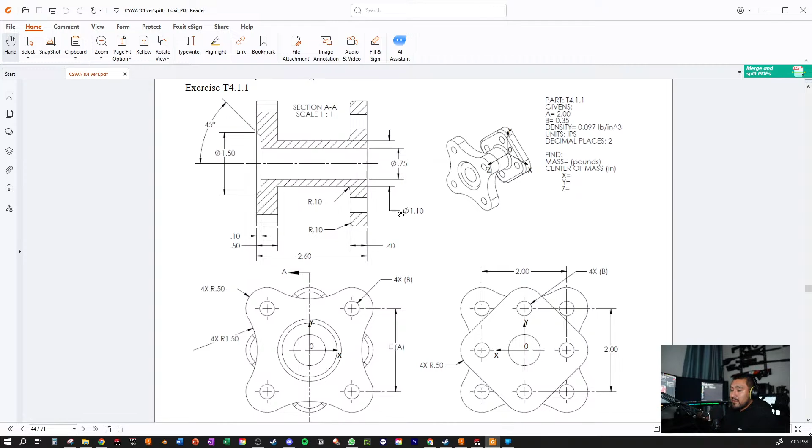Okay, do you see the two projects in there, or you might even have these in your packet? So for those who are wondering, I'm gonna go over a couple lessons from my packet, some basic parts. Juanito, you should have these as well. I'm just gonna go over this basic part. It's kind of my go-to to teach people. And I never made it in Fusion 360 before, so it's my opportunity to try it and see how far it goes. If you want to follow along, let me know if you have any questions. Don't be afraid to ask me. If you have questions, most likely someone else is gonna have that same exact question as well. So, all right, let's start.

So hopefully you guys have it installed as well. This is the Fusion 360 3D graphics area, whatever you guys want to call it. It starts off with this once you download it. In my case, I have a SolidWorks background, so I'm gonna change a couple things in the settings. To change your settings, go up to your name over here, and go to Preferences, to give it the same control of the movements of your mouse.

Right here, there's pan, zoom, orbit shortcuts. Default is going to be Fusion 360, but I'm going to change it to SolidWorks. And to keep everything lined up with SolidWorks, I do Y is up instead of Z is up. Those are about the two parameters I change. It's just my preference, but if you want to follow along 100%, this is the way to do it: Y is up, and SolidWorks type controls. Press OK there. Are you able to do that on yours, Juanito? Do you have Fusion 360 on your computer? Yeah, I do. Okay, cool.

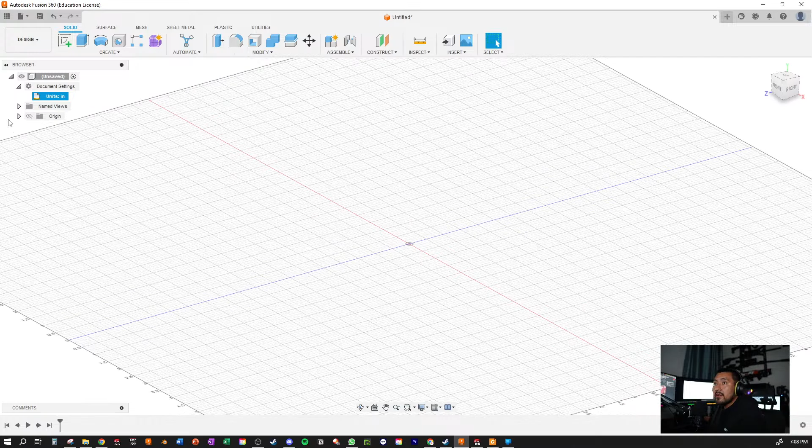So in the tree, we're gonna drop down this menu. We're gonna change the units, and we're gonna change the unit type over to inches. And press OK. And there you go. I got inches instead of millimeters. Now the question is, how do I start this part here?

I've taught this part a couple of ways, but I want to see if I could do it a different way. I usually start on the plate, and then the extrude boss. Actually, I might just do the same thing. I might just do plate, and then extrude boss in the center. So I'm going to start with this view first, and then work my way to the other view. Actually, I might do this view first since it's all in the back and the origin's back here.

So I'm going to start on this view first, the 2-inch, and then the radius. And then my B variable. I'm not going to do the variables in this one because I don't know how to do that on Fusion. So it's just going to be plain simple. I'm going to type them in. I know there's a way to do it. I just don't know how to do it.

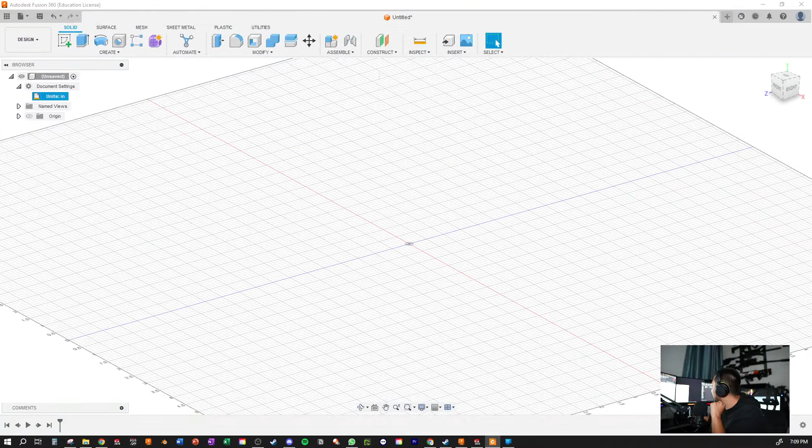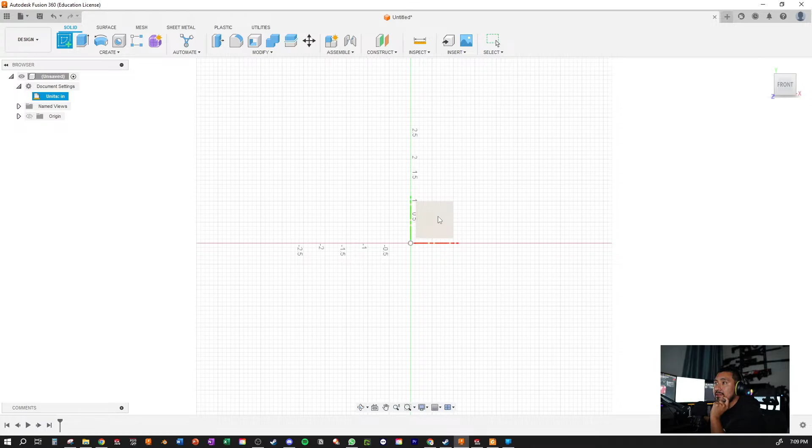So I'm going to go to the front view. I'm going to hit my front view here. I'm going to click sketch here. This is how you create a sketch. And I'm going to select this highlighted square box that basically represents the plane in Fusion 360. I'm going to click that box.

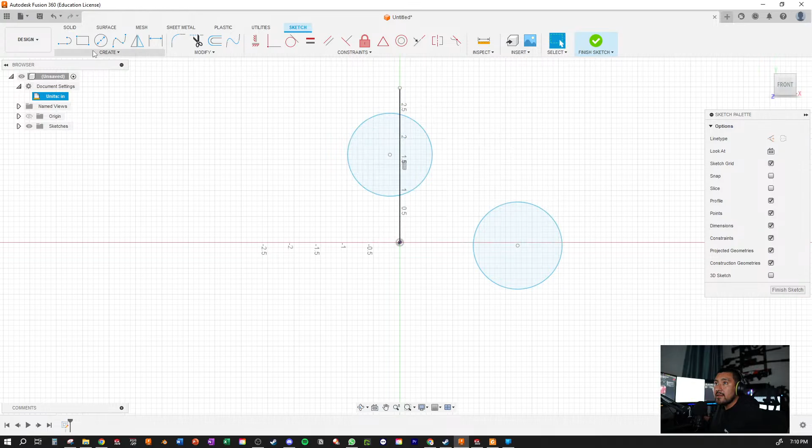And then the way I like to start it is I'm going to make 2 circles. So I'm going to grab the circle tool here, circle diameter. I'm just going to make it in 2 miscellaneous places. Hit escape. And then I'm going to grab a line, go from the origin all the way straight up, hit escape. Grab another line, select the origin, go to the right this time, hit escape to deselect it.

Then I'm going to select both lines, right click, and then there should be set as construction center line. There we go. That's just kind of help me tie these down. And then I'm going to be able to mirror all this when I'm ready. And then I'm going to grab a line, drop it down to the right. I'm going to hit control on both of these entities. And then I'm going to right click and hit tangent for one of them.

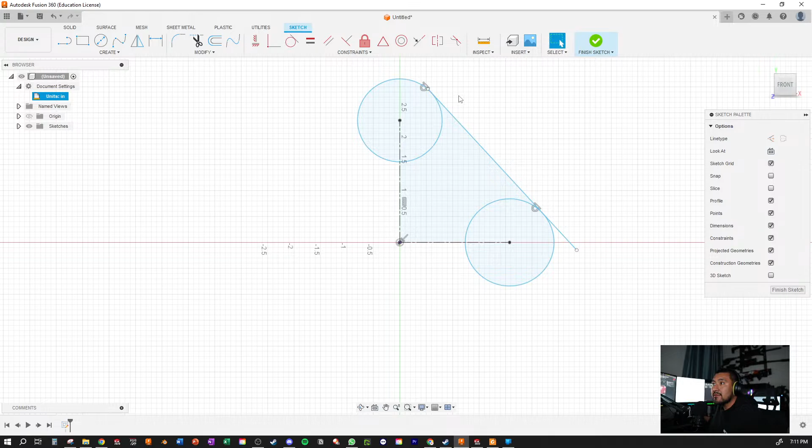I'm going to select these two, hit, oh, that's nice. It did it automatically. Did not know it could do that. That's actually pretty cool. Let me see. And then I'm going to see this small corner right here. I'm going to try to trim it. So up here, actually above modify, you're going to have the trim tool. I'm going to select the pieces I want to trim off.

How you doing there, Juanito? I'm doing good. Doing good? Okay. I want to keep on going then. Let me turn up my volume just a bit. Okay.

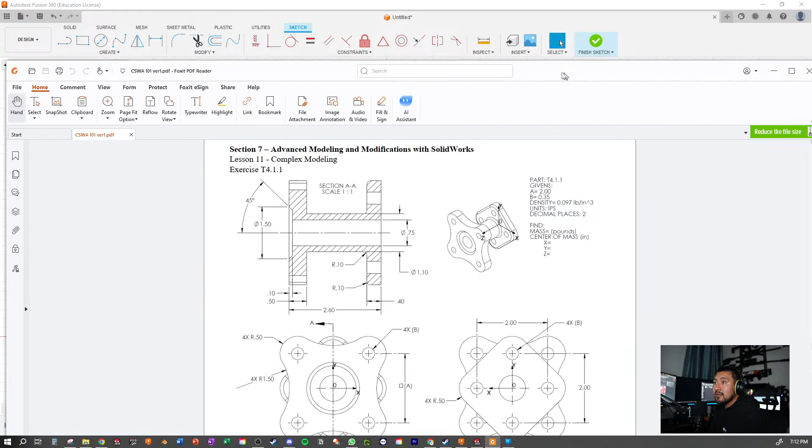Ooh, sorry. And then right here, I'm gonna select the line. Actually, no, I don't want to do that. I'm gonna look at my sketch real quick, because I'm not really sure where I'm at. 2 inches by 2 inch with my little tiny hole in the middle with a 1/2 inch round. So I'm gonna do the hole, I'm gonna do the round, and then I'm gonna do the 2 by 2. So let me grab a hole

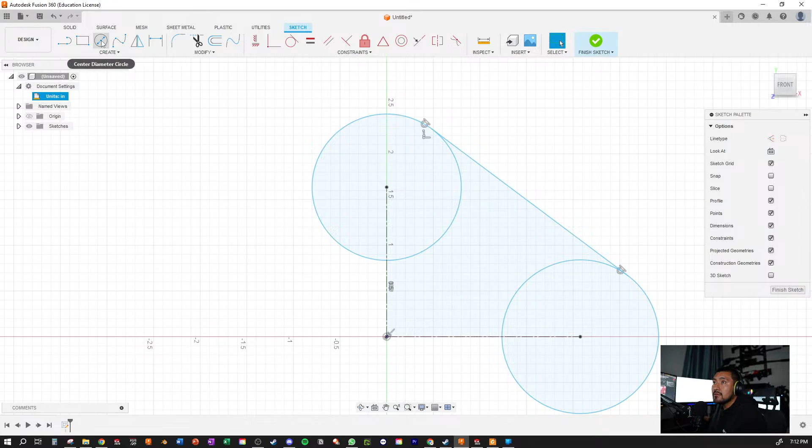right there, right there. I'm gonna select both, right click, equal. Then I'm gonna select both of these here. Right click, equal. And then the dimension for these is going to be the B variable, so it's going to be 0.35. So to give dimension to this, you're going to go up here above create, and you're going to hit the sketch dimension. Select one of the holes, and then input 0.35. Press OK. There we go.

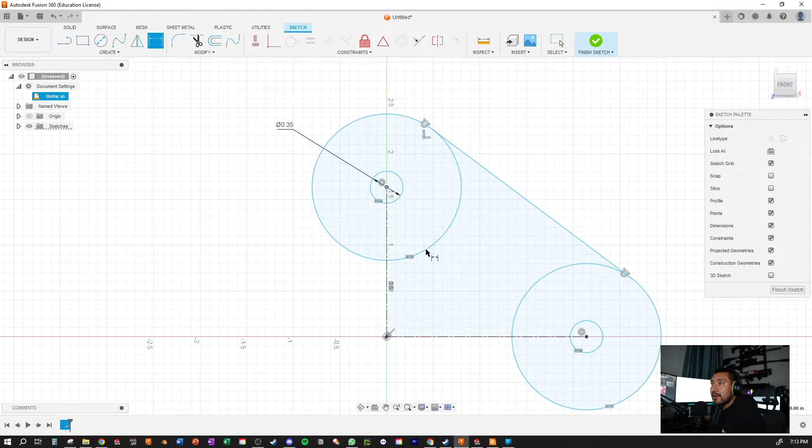And then hopefully this is like SolidWorks. This is something I don't know. If I click the center of this hole and I click the center line, does it get, it does, but it doesn't give me the option to make it half though. Not like SolidWorks where you can click, actually, can you? Click, nope, it just ties it down. I'm gonna put 2 inches here.

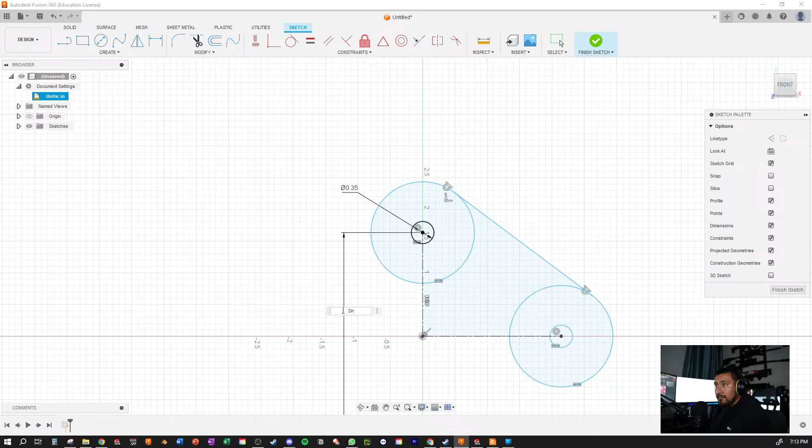That makes it extra big. And then I'm gonna grab the center here and my center line, and put 2. And I'm gonna make this just a bit smaller.

And I'm gonna mirror this line to the right. So I'm gonna grab this line and under, I believe it's modify. I can't remember, maybe create. Yeah, create. I'm gonna select my object, which is gonna be this line, select the mirror line, which is gonna be my center line here, and now I get the line there.

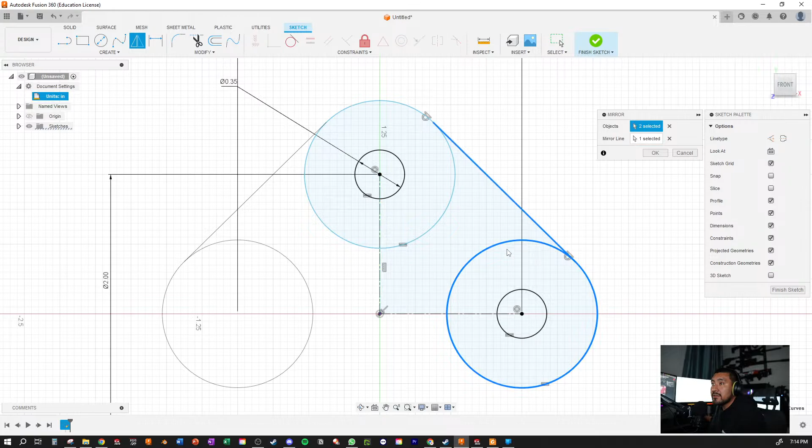And I'm gonna select this as well. I'm gonna select this round and this hole. Press OK. I'm gonna do the same thing to the bottom.

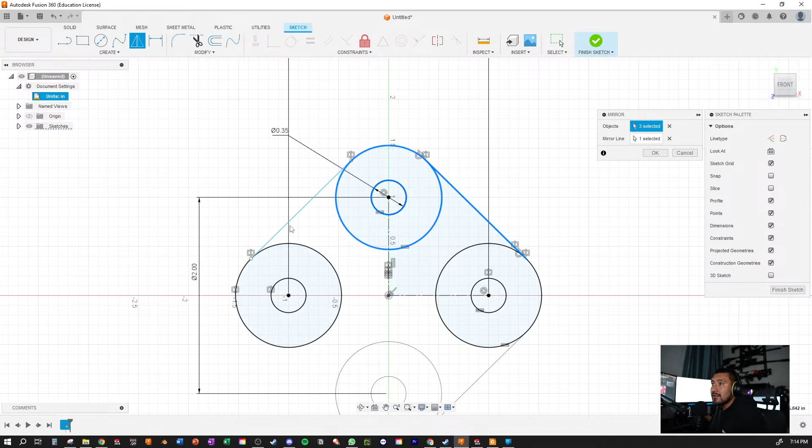So I'm gonna select, go to create, mirror, select my objects, which is gonna be this circle, and my mirror line is gonna be about this center line. Oops, almost forgot. I'm gonna go back to my objects. I'm gonna select this line and this line. We'll press OK.

There we go. I'm gonna start trimming stuff off. So I'm gonna go to above modify, hit the trim. I'm gonna select this line, that, here. There we go. Now we should have our plate.

Ooh, almost forgot the dimension. So go to sketch dimension. I'm gonna select one of these rounds and hit 0.5. I'm gonna hit escape to deselect it. And everything should be defined.

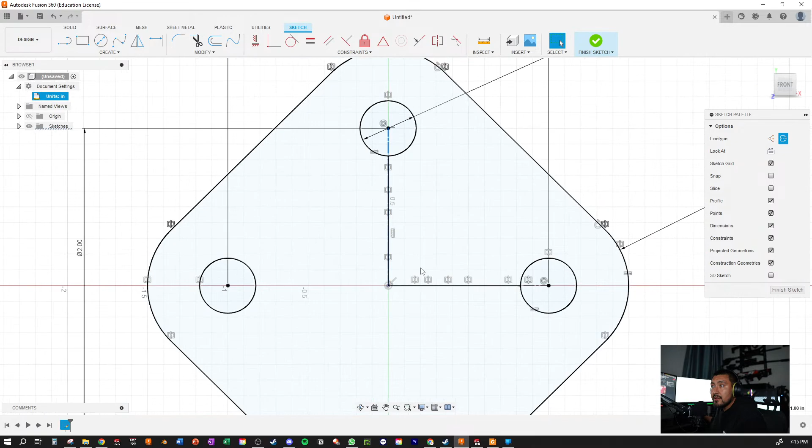There we go. Ooh, I don't want to change that. I think that's it that I want to do. And my center lines, yeah, I should be good. I'm gonna hit finish sketch.

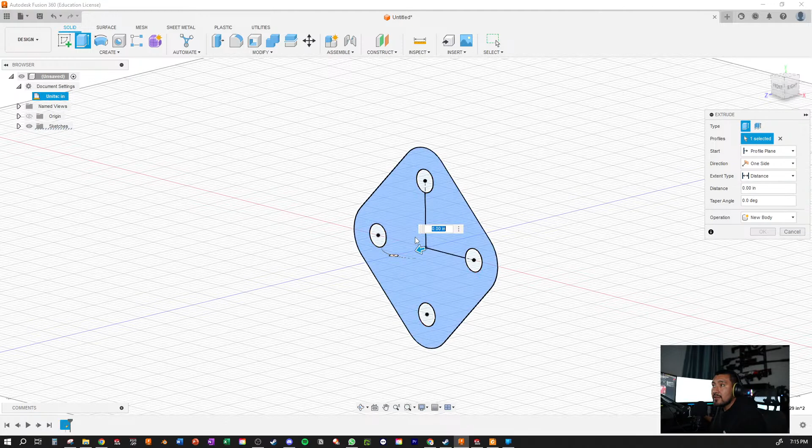And then now you see that sketch right there. Now I can hit extrude here, select my sketch or my area. Oops, I'll select my area here, and then I could drag it or I could give it a dimension. And that dimension is going to be 0.4. Press OK. And there we go.

We got one of the plates there. I wonder if I should do that center. Actually, I'll do that in the very end with an extrude cut.

Hey Juanito, how are you doing there? Doing good, you could hear me? Yeah, I can hear you now. All right, because I turned off my mic so I don't know if you guys could. I can hear you now. Doing it good? Yeah. Excellent, and stop me whenever you want, okay? All right.

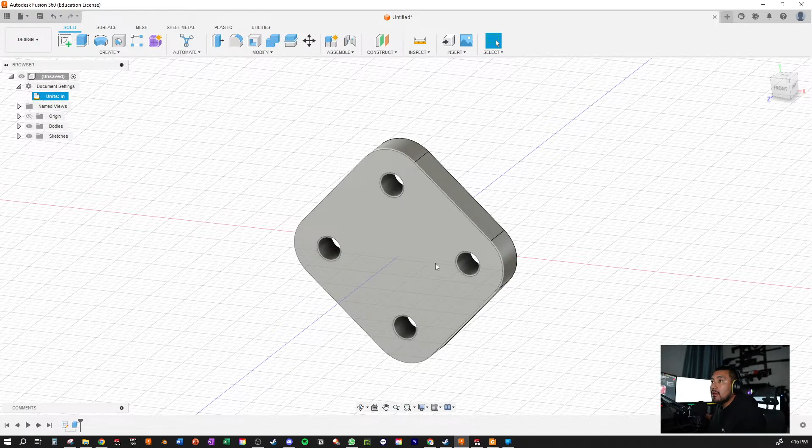Okay, let's go on to the next portion of it, which is going to be the other plate. Ooh, you know, I just noticed here, which actually looks pretty cool.

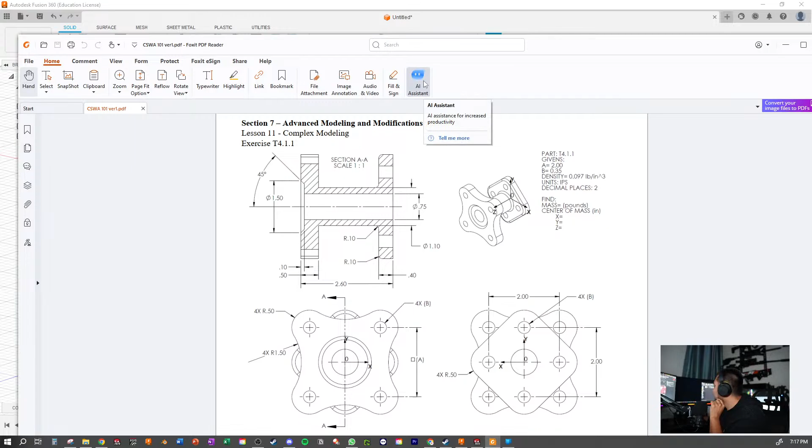Well, if I can find my mouse, I have a couple screens here, so it gets lost. There you go, I found it. I see this, so this is Foxit Reader, and I just saw here AI Assistant, for increased productivity. And I just never noticed there's so many tools here for a PDF. Select, snapshot, clipboard. I mean, I use this at work to sign drawings. I do the protect, and then I use a certified ID signature, blah blah blah, to protect the document. I just never seen this AI assistant. That's pretty cool, and it's like free software, so I think it's free. Maybe you gotta pay for this. Is there a subscription? I'm pretty sure there's a subscription somewhere for this. Anyways, that was a little side step.

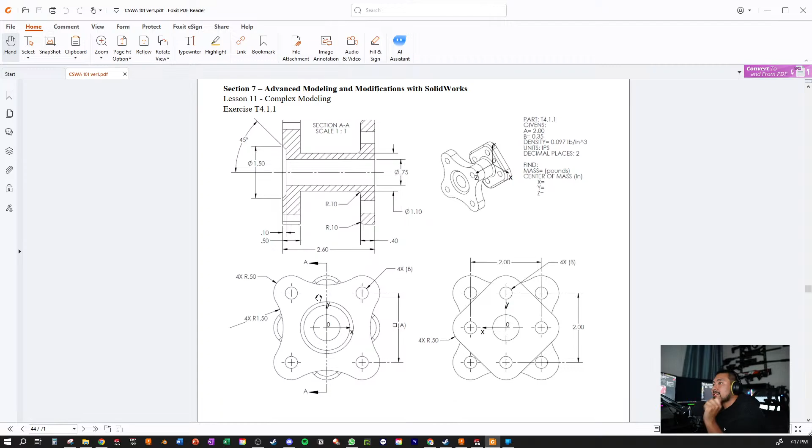Oh yeah, what we're looking at was this plate right here. So I'm gonna do something similar where I just do a center line and draw all this stuff here. So let's do that. Oh, in this case, I'm gonna drag a plane first, and then I'm gonna do 2.6. So I'm gonna drag a plane 2.6. And we're about to find how to do that because I'm not entirely sure.

Is this what they call the blind leading the blind? That's probably the case here.

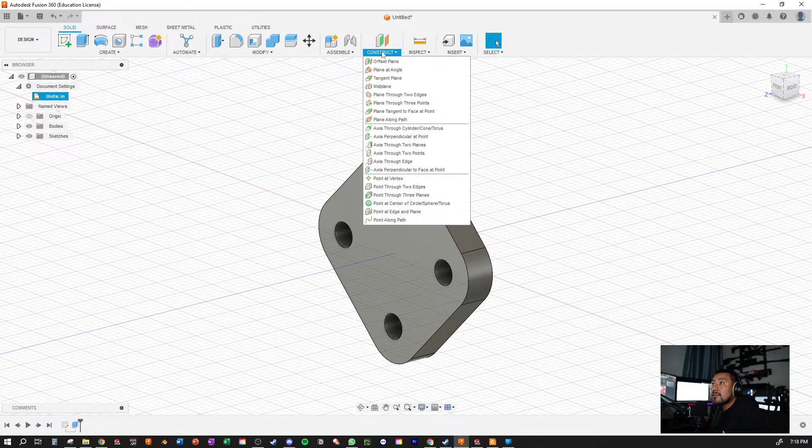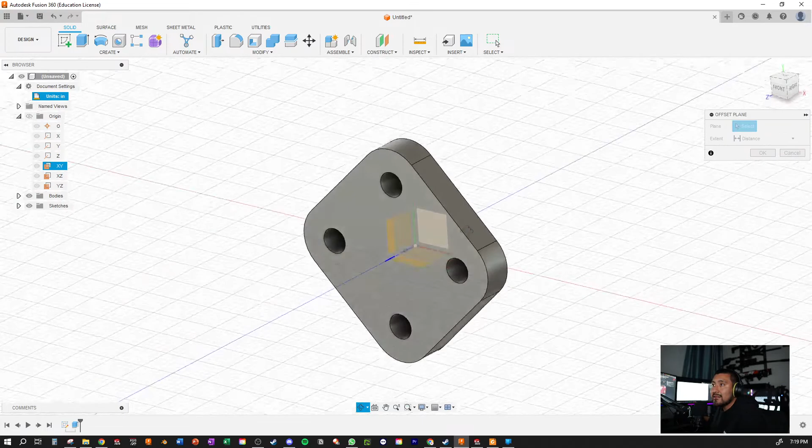Construct offset plane. I'm going to select this plane here. Or if you want to be 100%, you could see your little icon here, the front plane. You could go over to the drop downs and hit origin, and it's going to be one of these planes, and they highlight in the 3D viewer as we go. So the one we want is the XY, which is the front plane. I'm going to select it from here, or you can select it from here, highlight it, and then select it. Either way is fine, depending on how many planes you have. One could be more useful than the other.

And then I'm going to drag it. I don't know, it feels more fun to drag stuff in Fusion than it is in SolidWorks. I like it more here. Let me know what you guys think. So here, 2.6, press OK.

I'm going to right click this plane. Actually, you select the plane and then hit sketch, and now you're there. And then I'm just going to hide this body so I don't get any mistaken constraints.

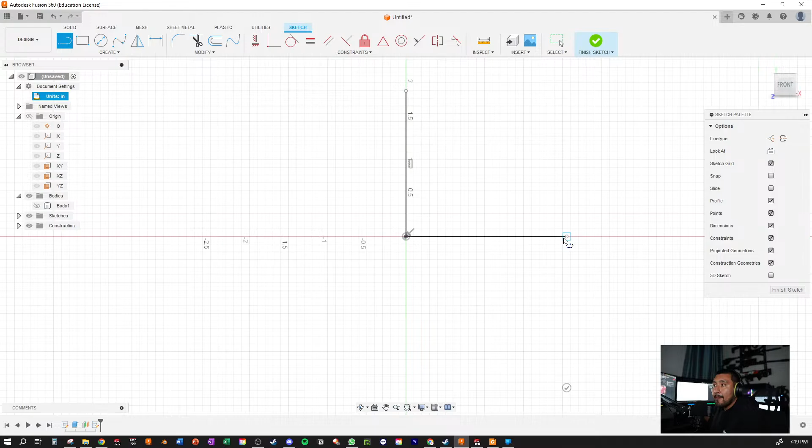I'm going to draw two lines, one going straight up, the other one going to the right. I'm going to select both lines with control, right click, and set as center line. And then what I'm going to do up here is make a big circle.

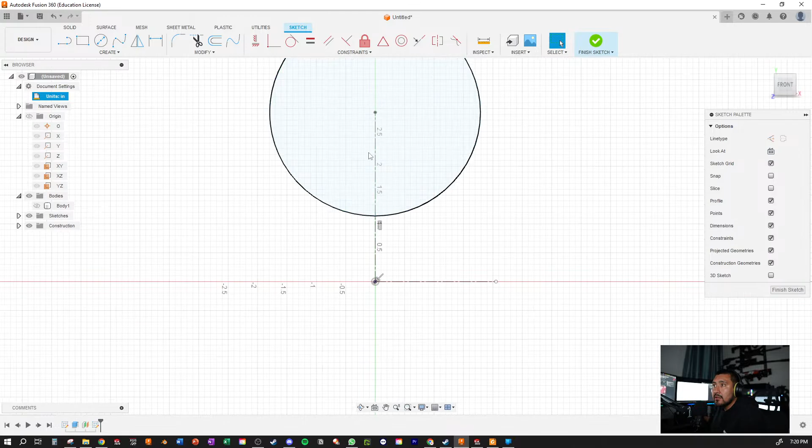I'm just going to drag it to the top, make it a little bigger. And I'm going to do the same exact thing on this side, just make a big circle. I'm going to make it just a bit smaller so I can see what I'm doing.

And now I want to do one round here, one more inside. I'm going to hit control, select two of the rounds, right click, hit tangent. I'm going to select the other two rounds with control, right click, tangent. There you go, now it's tangent.

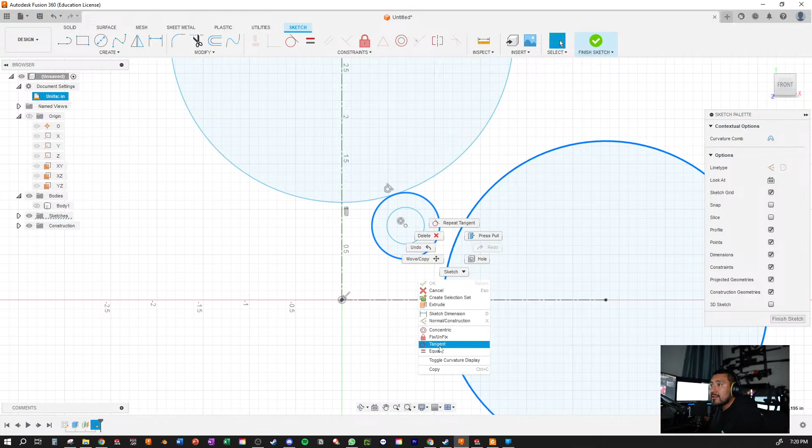And I'm going to constrain or add dimension to this hole because I already know what it is. It's going to be 0.35. Excuse me for the coffee, I guess I'm a little sick. I didn't realize talking made it a little bit worse, but I'll power through it.

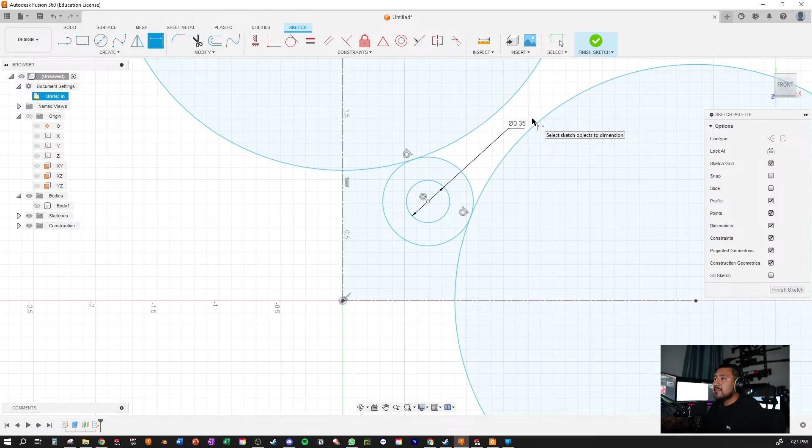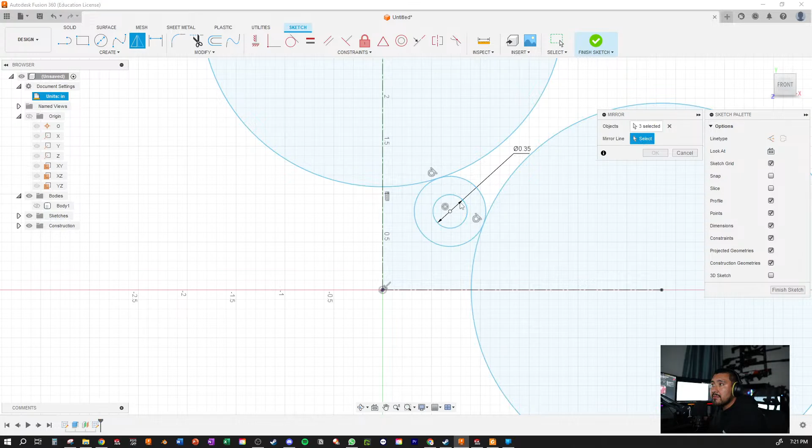Now the next part we're going to do is mirror both of these to the left side. So I'm going to do the same exact thing. It's under create, mirror. Select my object, so it's going to be this round, the hole, this giant circle. Select my mirror line, which is going to be right there. I'm going to press OK, and I'm going to do that one more time.

Create, mirror. The objects are going to be this top circle, this entity, this entity, this entity, that entity, and then select mirror about. You see that, all those mirrors. Then I'm going to hit OK.

And I'm going to do the trim tool. So I'm going to trim that piece off, trim this piece off, trim that, trim that, and then I'm going to do these inner rounds as well.

And then I think I didn't, so I'm going to hit control on both of these, right click, I'm going to put equal. There we go. So now I should be able to... oh, I just hit escape twice. We'll see what's going to happen.

Okay, so I'm going to just stretch this up and down. And oops, my mouse got lost.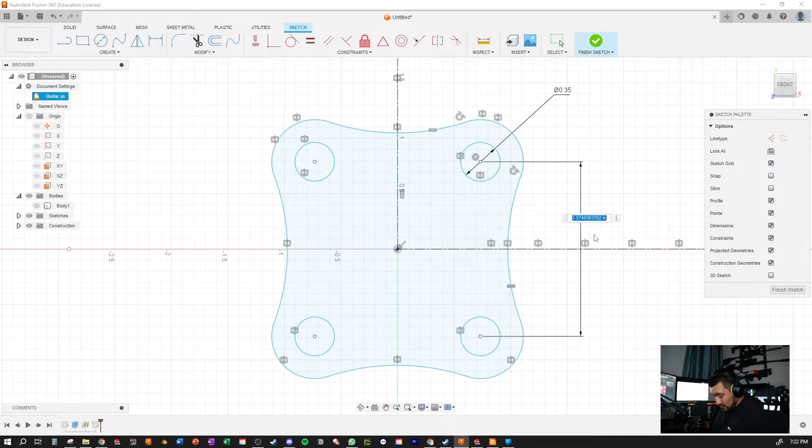And now I'm going to add a dimension here to here. What's the dimension for this one? It's going to be A, which is going to be 2. And I'm going to do the other side, here to here, and I'm going to do 2. And then the outside, this one's going to be 0.5.

Let me see, there should be a large one out here for this one. There we go, that one is going to be 1.5. I'm going to hit 2, 2, 0.35, 5, 1.5 radius, and there we go.

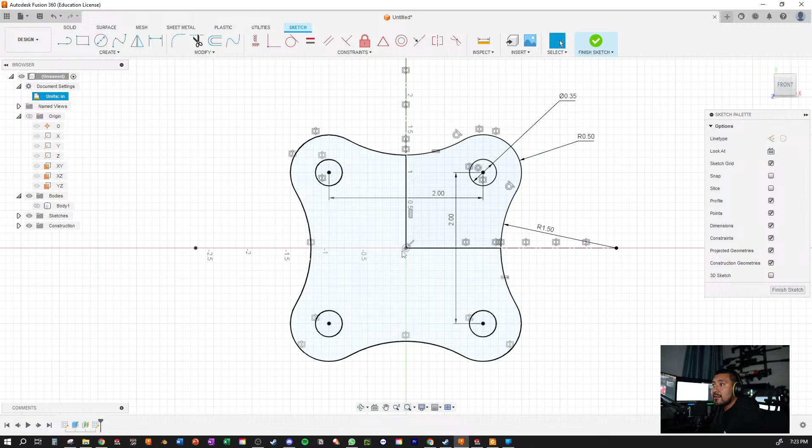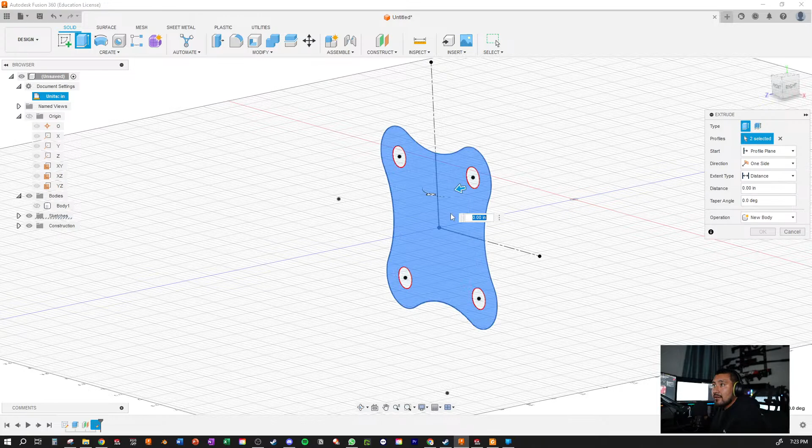And then everything seems to be black. And now I'm going to go to the extrude, which this extrude is going to be 0.5. So I'm going to hit finish sketch, head over to my extrude, select the region inside. Select both my regions, and then I'm going to extrude it out. It's going to be 0.5, and this one's going to be 0.5 in the negative. There we go, I'll press OK.

Now I got 2 bodies, so I could go over to my bodies folder and then make the other one visible.

Now I'm going to create the center shaft, or the center cylinder. So you see like the cylinder piece right here, I'm going to go ahead and create that center cylinder.

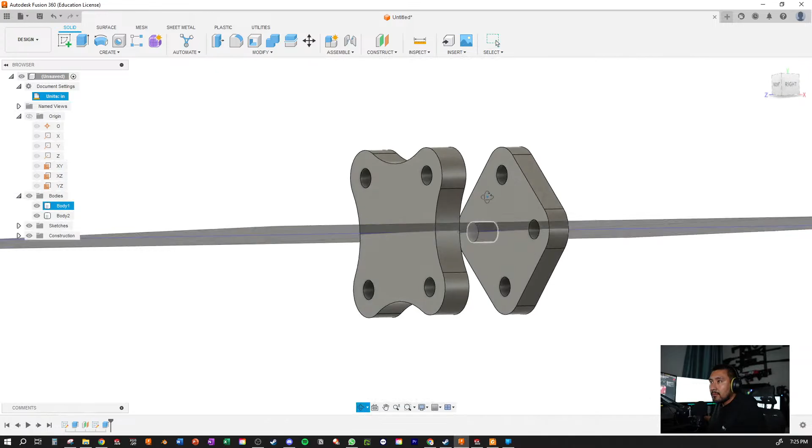This part is very difficult. You guys will be surprised how many people I interviewed and cannot pass this. When I interview somebody, I use the same part and I could get an understanding of where their skill level's at with SolidWorks or Fusion 360. But another time - for this I'm just going to do this part, ask questions at the end, and wrap it up so I don't go over the hour.

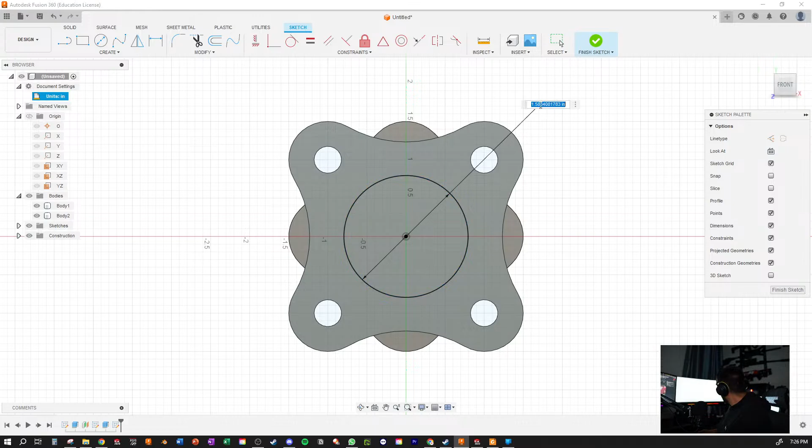Okay, going back, I'm going to click this face, right click, and do a create sketch. I'm going to select a circle, go to the center, make a giant circle, click sketch dimension, and get the dimension 1.

There we go. This one's fun because I'm not going to do a blind extrude - I'm going to do almost an up to surface, like in SolidWorks. So I'm going to head over to finish sketch.

Actually, sorry - I was supposed to have someone else join me, but it's fine. Maybe next week he'll join us. He had a couple questions, I thought other people - he showed me some interesting stuff. Just learning, but that's fine for another time.

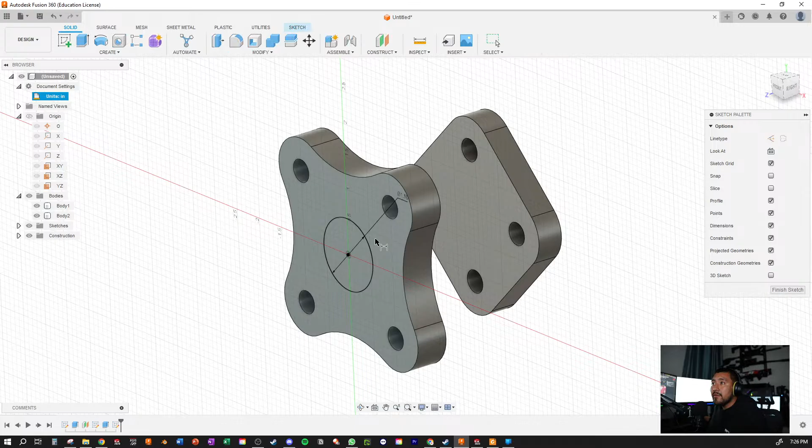I'm going to hover over here and hit extrude. I'm going to select the region inside, and just select this direction - you see how it turned red there? This red means it's a negative cut, not a boss extrude like in SolidWorks.

This boss extrude is actually both in the same tool - it's extrude cut and extrude boss, so it could create or remove material. The way you change the type is right here under operation. Instead of cut, you could put join, and that creates the boss extrude to merge with this part. So right here, operation: join or cut, depending on what you want to do.

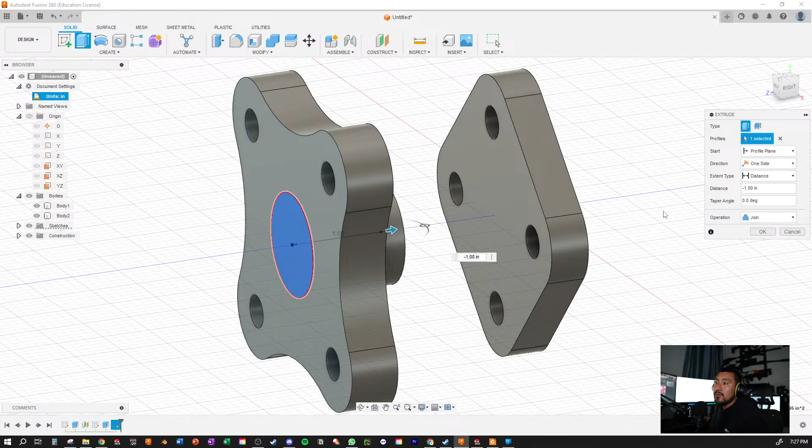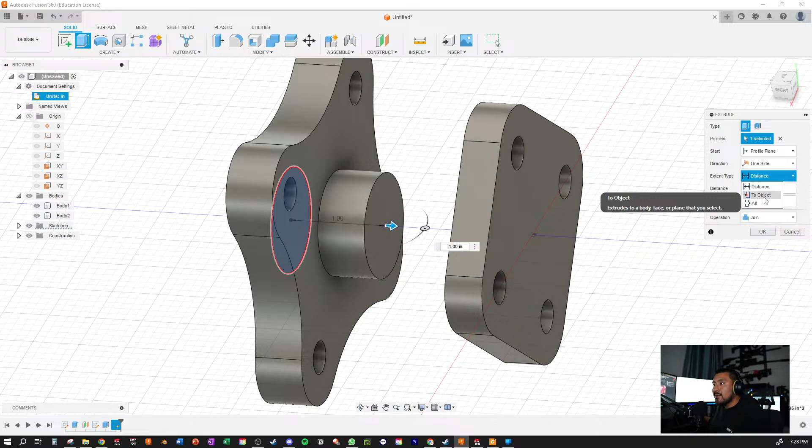For this case, it's going to be join. Then the start is going to be profile plane, and direction we already have. Then for the extent type, instead of doing a distance, we're going to go to up to object. Unlike SolidWorks, it doesn't say up to surface, up to body, or anything like that - it's up to object in this case, and it's going to ask you for a surface.

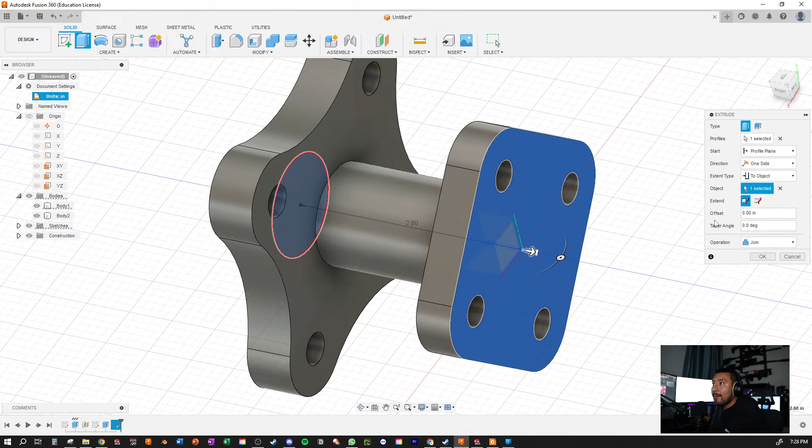I believe you could go up to a body as well - there we go, you can select a body, and it'll go up to whatever you select instead. So here I'm going to do up to surface, select the body type, and it's going to go up to there. This is parametric, just like SolidWorks, so if you change that dimension 2.6, it'll change along with it - you don't have to ever do that math, you only do it once. So there I have that center shaft.

Now I'm going to create that center cutout, which is going to be 0.75 right down the middle. So I'm going to right click on this plane again and hit create sketch. Notice that time I actually right clicked and did create sketch instead of going up top - just a quicker way to do it. I know there's a keyboard shortcut, I just don't know it.

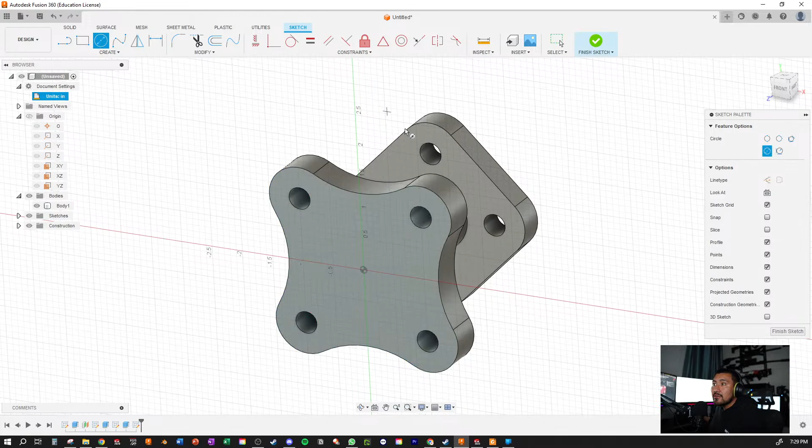So here I'm going to hit my center circle again, go to the center, make another circle, and add a dimension to the circle - that dimension being 0.75, 3/4 of an inch.

I'm going to head over to solid, extrude cut, and this time I'm going to do a cut. I'm going to select the region - my bad, I'm going to go in this direction, just get a direction, and instead of distance, I'm going to go all. Press OK, now I made the cut.

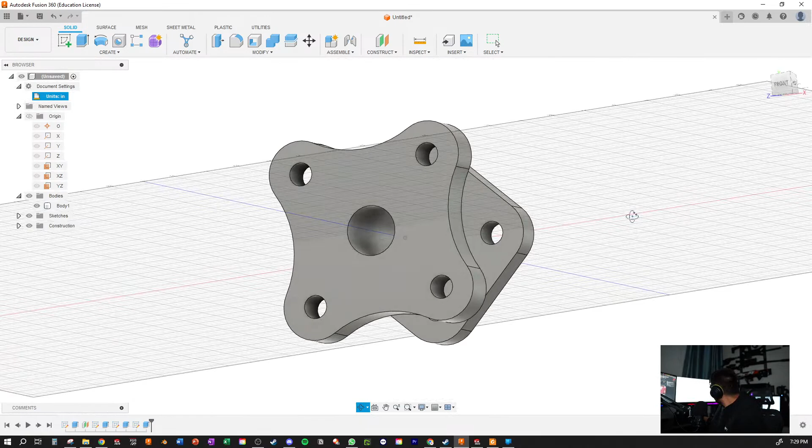We're going to do the same exact thing. I'm going to right click here, create sketch - oops, create sketch. I'm going to grab another center circle, just make a slightly bigger one here. I'm going to hit my dimension, and this dimension is going to be 1.5 this time.

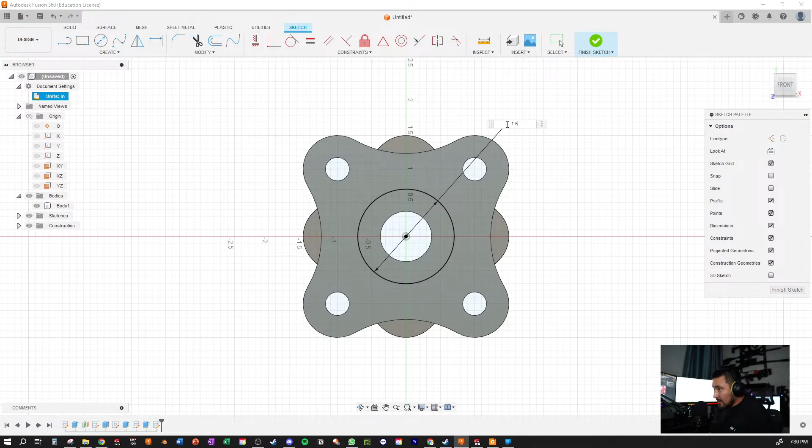And this time we're going to do an extrude cut with a distance. I'm going to go up to solid, extrude cut, select my region - I guess I'll select both regions. I'm going to go in this direction, and it's going to be 0.1 negative in this case, with a cut operation. However, this time we're going to add a tapered angle, and that tapered angle is going to be 45 degrees.

Apologies if I haven't shown the drawing in quite a while, but here's that 1.5, 45 degrees, 0.1.

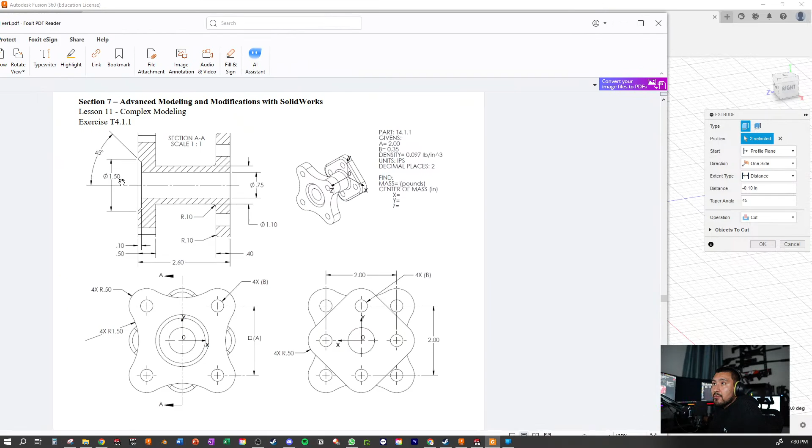And then this angle, I think it's supposed to be negative. There we go, hit the negative and it goes on the inside instead. I'm going to press OK. And now I got that additional cut here.

Now let's look at the drawing real quick, in case we're missing anything. Okay, so I have this cut, I have the center cut, I have this plate with the 4 holes. And now I believe I've got to do the 2 radiuses here. It's going to be R.1 and R.1, and that one's going from this first plate on the front side and around the edge. So let's go do that.

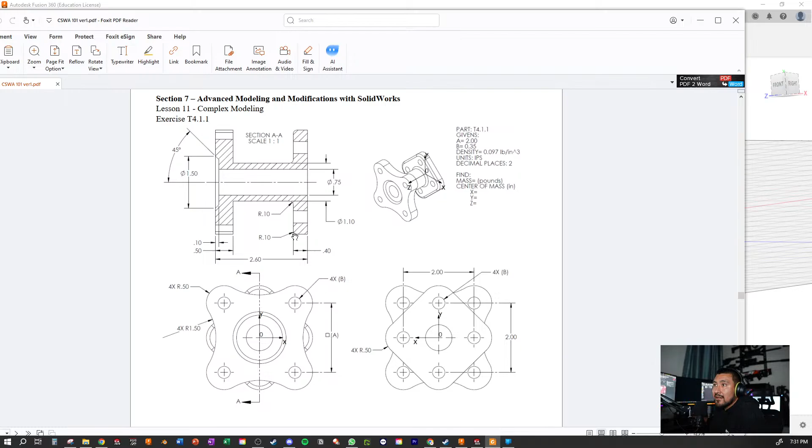I really like how the radius tool is in Fusion 360. I think it's a little bit smarter than SolidWorks, and I'll show you guys why. So I'm going to head over to the fillet tool and select the fillet.

You see this here? In SolidWorks, if you have a radius, you have to do multiple feature tools. Right here, you could do it all in a single tool. You just need to add it — you could make selections and give each selection its specific radius. So you're just doing it all in one tool. That's what I like about this version of it.

In this case, it's going to be the same tool selection, so it's going to be this one — you see that, one edge. And I'm going to select up here, and then 2 edges, so this is 2 edges... I guess 6 edges, because I selected the tangency around it. But I can add a second one and get a different radius.

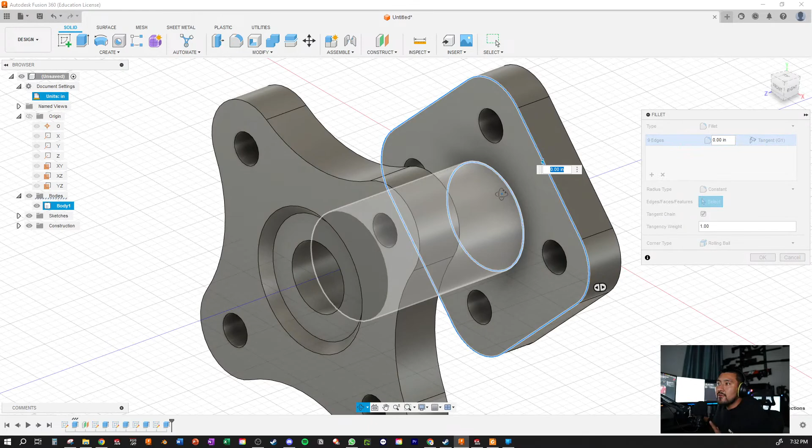And then the other cool part, this is why I like Fusion a little bit better for the radius part, is that I could drag this and get a feeling of what I like. In SolidWorks I had to play with the number up and down, but this one gives me a little bit more intimacy with the tool, which I don't really get with SolidWorks. So that part I like, and that dragging up and down for me is kind of a game changer.

And in addition, adding on tools and just changing one fillet at the end seems more intelligent to me. So there it is, tangency — wait, I don't know what that means, I've never had to mess with a tangency. I'll experiment with that, not right here, but I'll experiment with it. And it's going to be 0.1. I'm going to press OK. And there you go.

Now I have the part, and Fusion 360 does it a little bit different with how you save your parts. They have something called an online cloud — if you've ever had something like OneDrive, Google Drive, or Dropbox, it's very similar, where you don't save your files on your desktop, you actually save them in a library online. This is cool because it gives you access to all your files from any computer with your Fusion 360 account, which is pretty cool. It also has a very useful tool for connecting multiple people together, so I'll get back to that a little bit later on.

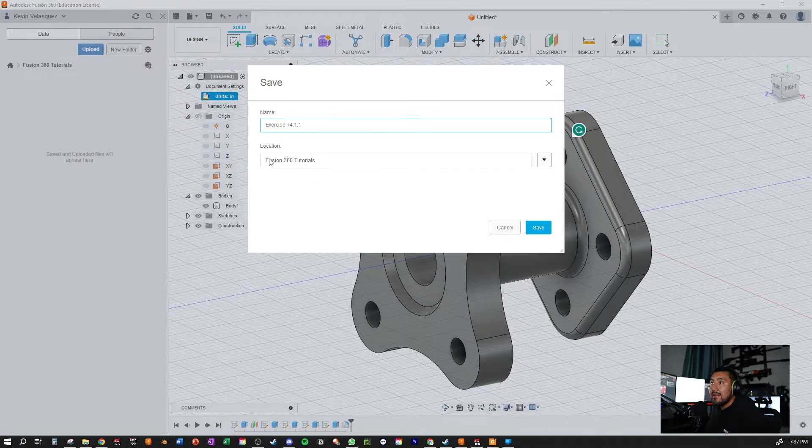And I believe I did this in 2 parts. Oh, actually, I call it something different. I'm going to call it exercise T4.1.1. And then my location is going to be the Fusion 360 tutorials. And I hit save. And you'll see on the left side, it pops up. And this is where if you start adding multiple files, you can start looking at every file.

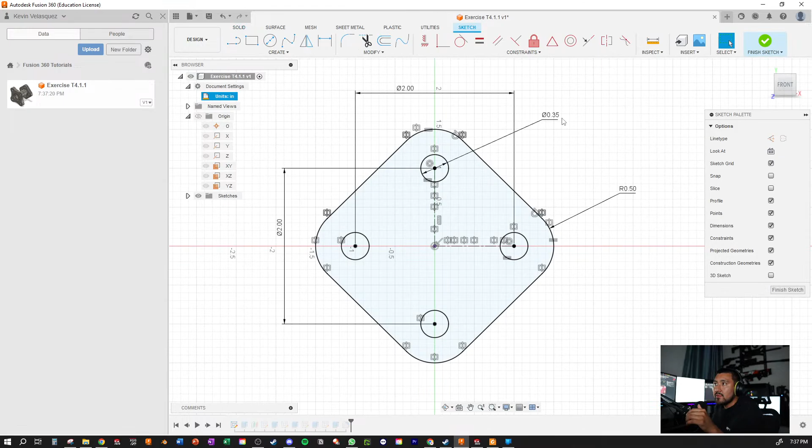Now, something I'll show you guys here, and I really like how this versioning works, the way they do their saves, is that if I were to change one of these circles. Let's go here. Edit sketch. I'm going to change one of these circles to 0.5. I'm going to hit finish. And then you see that that hole is bigger now.

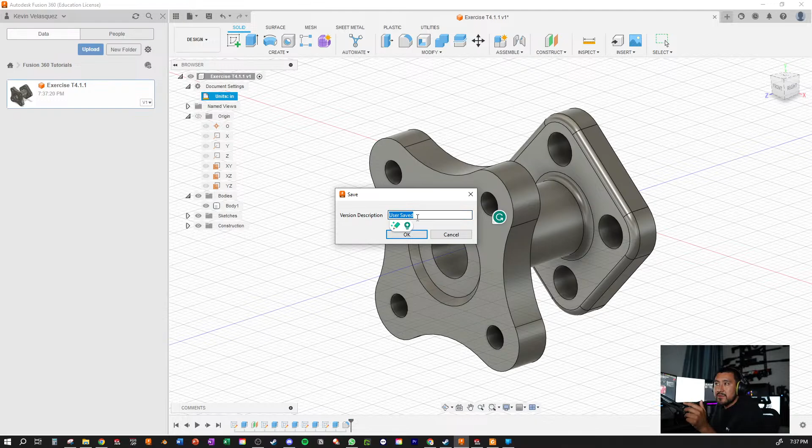So you can actually go to your exercise and you can hit save again and look at this V1 here. You can put a description in there. I won't put anything this time, but press okay. And then it should say here, hopefully. Oh, it's loading. Now you see V2.

And that's cool because I'll show you with the drop down menu here that it tracks every one of your saves. And if you ever need to go back on a project to a specific point in time, you can actually go back to this. I'll open up the file here, and then it'll be that version of the part. That's brilliant. It maintains your entire save history. And then you could go between the 2 parts and even make whole new save versions of this.

So I'm gonna go back to my version 2, and it will even give you details of who changed it, what changed, etc. And look, drawings too. I haven't explored it fully in depth, but that capability is very powerful, especially when you have a group of people working on a project.

I don't know if you guys ever had a college project where you're all working on one single document. Like in Google Docs, that's key when you're working in a group because it'll show you the change history. And this just helps when you have a huge group of people working on a single project. That's one of the reasons why I prefer Fusion 360 over SolidWorks, that teamwork. Like I was talking about earlier, when you have that teamwork built into Fusion 360, over here, I could go to people.

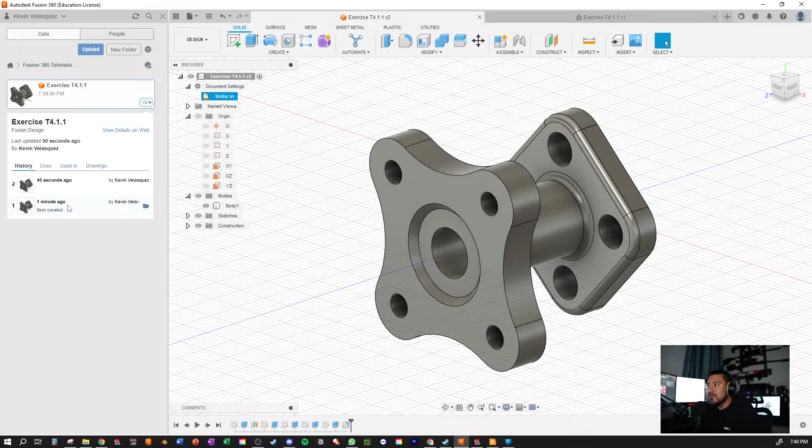Anyways, that is my tutorial on Fusion 360 for beginners. And then hopefully by next week I can show you guys the other part. But now I want to go into the questions part.

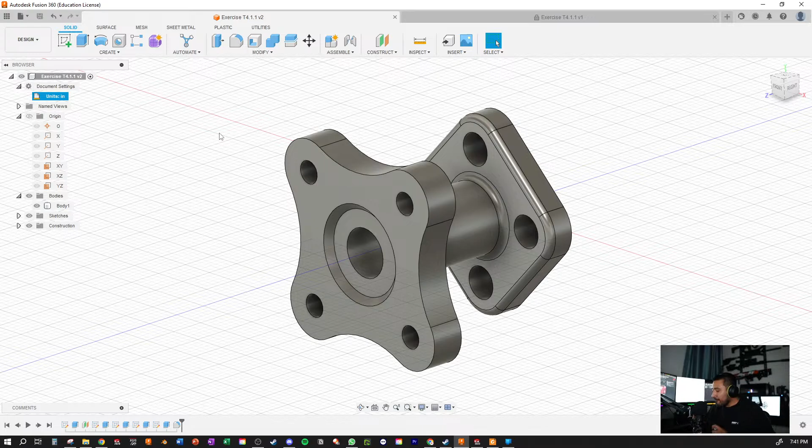Okay. So I'm gonna go back. I'm gonna close this one. And I'm gonna go super basic right now. I am just gonna do a plate with 2 holes, just so we could create something. I know we're on a live chat, but let's try to have a little bit of one-on-one to see where you're at with this. So it's just me, you in the chat.

My brother left. He left without me saying goodbye.

Yeah, that's him. But let's see if you can follow on. So I opened a brand new Fusion 360 blank part. If you could start up one, let me know if you see the same exact window. Yeah, there. Cool, you're there. Okay. So over here in the top left, hit create sketch. Click that. Sketch, top left. Yeah, top left, create sketch.

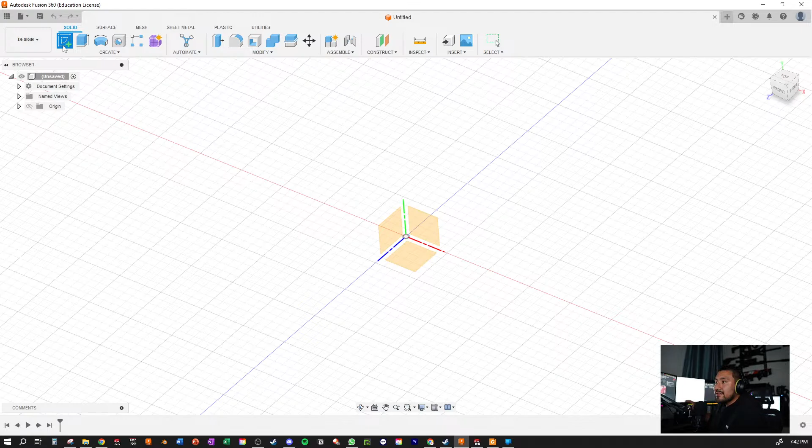Oh, even if you want to, and no one else could see this, if you want to show your screen on the Discord, I could see your screen and nobody else sees it. How can I do it? Let me see. Do you see where my screen's at? On the bottom left, there it says start streaming and all that. Click the bottom arrow, and you can select what you want to stream to. Well, it says live, but this is live only between us. This isn't live on YouTube. Share screen. Just so I can help you with anything particular.

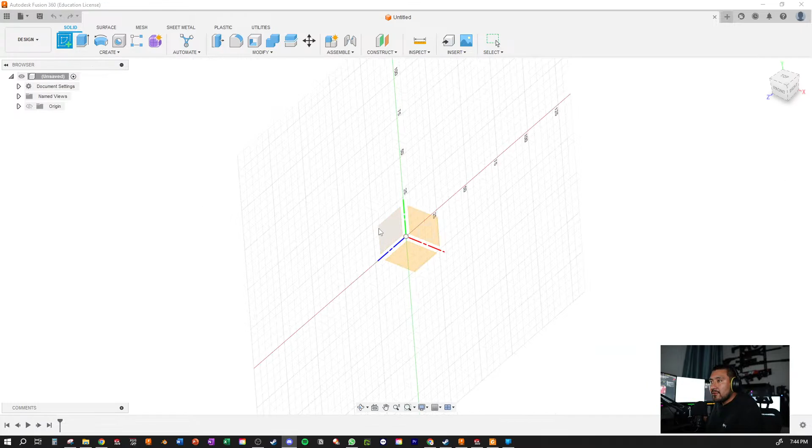Watch stream. Oh, it might be like an internet connection issue, huh? Oh, it's not letting you see it? No, not yet. It's a little bit slow. But I'm gonna continue with my screen. Right. So you hit the create sketch, right? Do you have these 3 boxes highlighted? Hold on, let me do it again. Okay. You can always hit escape or right click out of it just in case you click the wrong thing. Right now, I just hit create sketch and nothing else.

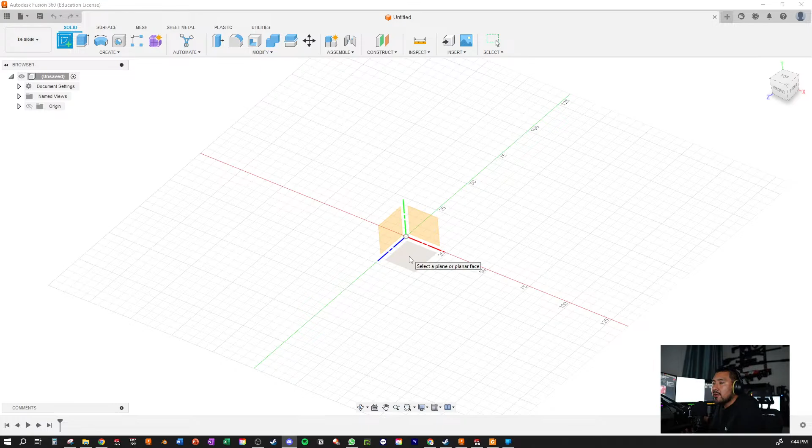There. Cool. See the boxes? You see the yellow boxes? Now let's click the one that is between the blue and red. And if you don't have blue and red, it doesn't matter which one. Just click, if you can, this specific one or any one of them that you can. Go ahead and click it, and it should make you automatically normal to.

Cool. Okay. And right here, we're going to go to create. You see this create button here? It's down click. And then we're going to go to rectangle. There. And then center rectangle. You see that center rectangle? Let's select that. And then you see like this, I don't know, is that like a nuclear symbol?

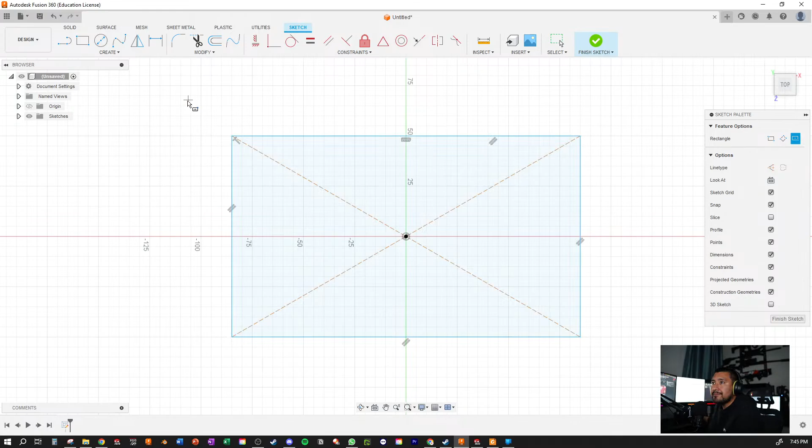I'm not sure. But you see this middle symbol here? It kind of highlights. The center point? Yeah, the center point. We're going to select that. And then just kind of drag out your box. Right. To whatever, right? And then we're going to go to dimensions. We're going to select the top horizontal line.

Select that. And then, I don't know. What do you feel like? 200, 170? What do you think? 200. Let's do 200. And then we're going to make this a rectangle. So the other side we'll do, I don't know, 120? Yeah, sounds good. Cool. And then we're just going to grab one circle.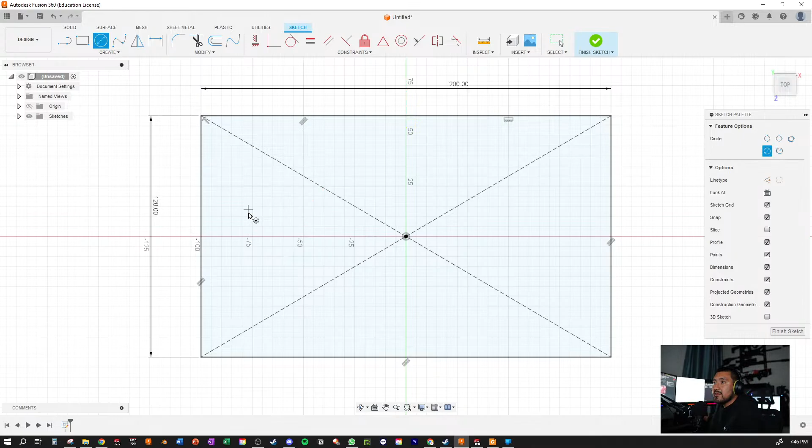And then we're just going to place it somewhere in here. And I said 2 circles before. We're not going to do 2 circles. We're just going to do the 1 circle here. Are you able to place 1 circle inside of this rectangle? Yeah. Okay, cool. Now you see these arrow and lines, this smart dimension tool or sketch dimension? Select that. And we're going to make this hole 30 millimeters.

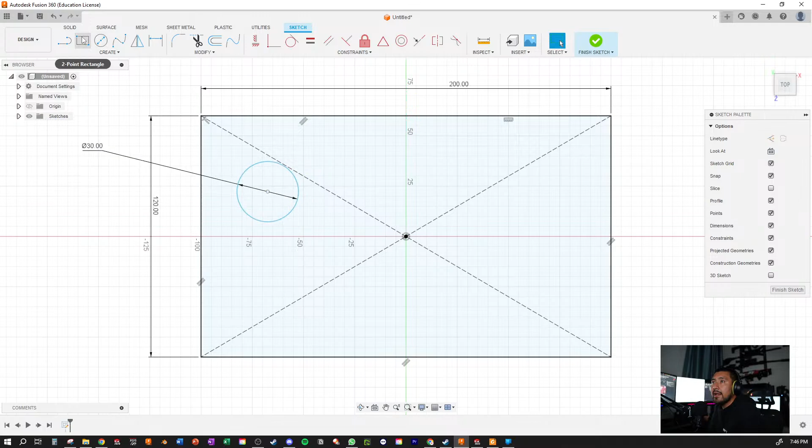Cool. And now we're gonna hit the smart dimension, and this time we're just gonna grab the center of the circle to this line, and then we're gonna drag it so it's horizontal, or I guess the numbers are vertical, and put 20. Are you able to do that? Yeah. Cool. And we're gonna do the same thing here, but horizontal this time, and we're gonna do, I don't know, 60.

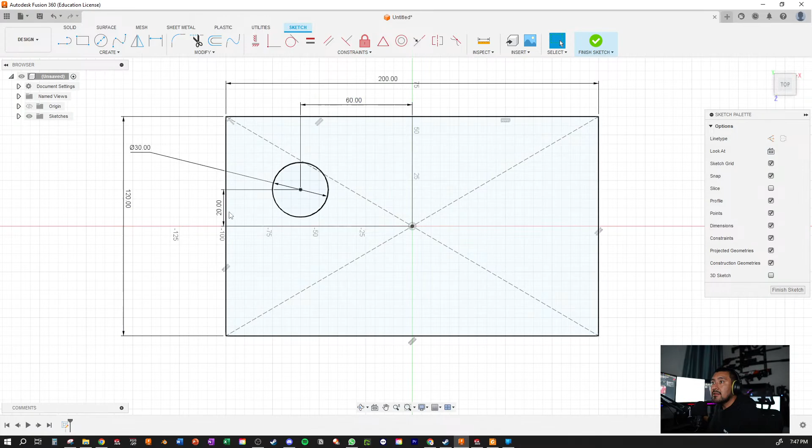Nice and cozy? Okay. Now we're gonna hit finish sketch. And then let's just rotate it to kind of this view here. Let me know when you're able to get it into that view. Good? Yeah. Okay, cool. Now we're just gonna hit extrude.

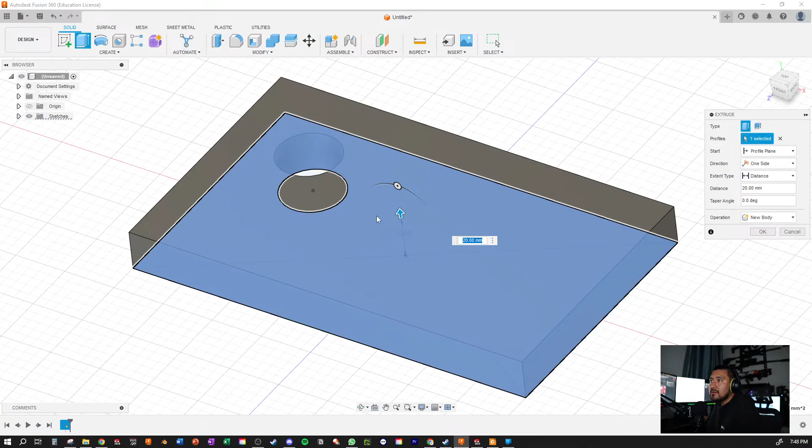And then we're gonna select the region. You see like this blue region? It doesn't highlight, which kind of sucks, but you could select it and then it will highlight. All right. And then you see this arrow? Just pull it to whatever you want. Let's do 20 if you can't decide. All right. Press OK. And that's it. You made a plate with a hole.

Let me know when you have that body. Yeah, I already have it. Cool. And that's it for tonight. That's basically the lesson for tonight. It's the basics of tutorials. And we'll try to do a little bit more later on. Hopefully you could try to catch up to me with Fusion 360.

And yeah, that's it. Any questions beyond that? No? Okay. Let's see, it's 7:49, so I'm gonna start closing up the stream. I'm gonna ask the stream this time. Do you guys have any questions? Anything you guys want to look at? Do you guys want to dive into a deep rabbit hole here? Existential life crisis or cheating wives?

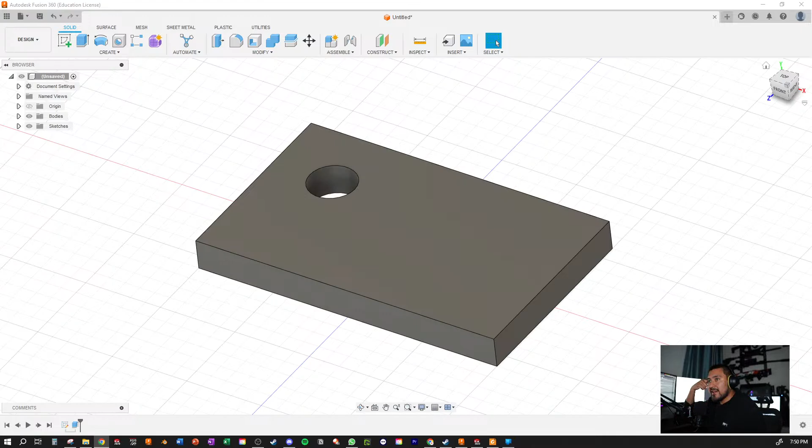Anyways, that's about it. I did want to share something, especially with you, Juanito. Give me one moment to pull it up. I don't remember where I had it actually. So my brother, he does these conventions. Have you heard of like Design Con or Comic Con? What's another famous one? Anime Expo. You ever heard of any of those? Yeah. So he's gonna go to one called Designer Con, something like that.

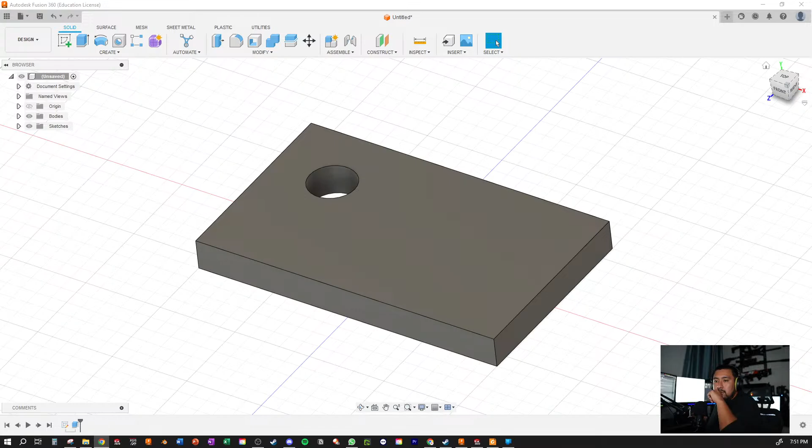And we went to one last time. Oh man, I can't download this. Do I have SolidWorks still open? Yes, I do. Me and my silly SolidWorks.

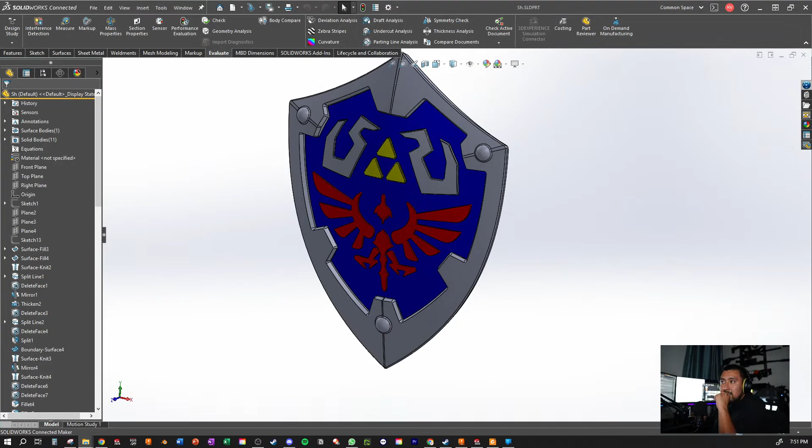So I started designing this earlier this week. I'm gonna show you, and you probably know what it is right away. There we go. Oh, the shield from Zelda. Hells yeah. So I want to show the sword, which I think you've already seen. I'm gonna do the sheath, which is where the sword goes in, a display stand for the sword, the shield and a display stand.

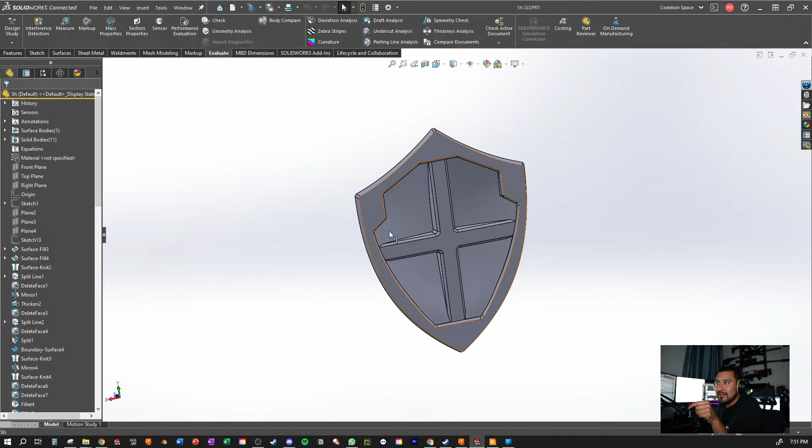Now I haven't quite finished the model yet. I need to add a grip portion so you could hug your arm against this on the back. And I don't know if the sizes are right. This is what I found online: 19 inches by 25. Hopefully that's a good sizing, but yeah, I'm excited for that.

It looks really cool. Yeah, and actually, I was kind of thinking maybe I could give you one of these other side projects I wanted to take on. It has a little bit of surfacing on it. I was waiting till the weekend to see where you're at, and then I was gonna give it to you. Like even this one, I was gonna give you this one, but I found out that this is actually really difficult. It's very weird. I'll show you what the tree consists of. Now that I found the solution for it, it's easy, but it took me a good half day to figure it out.

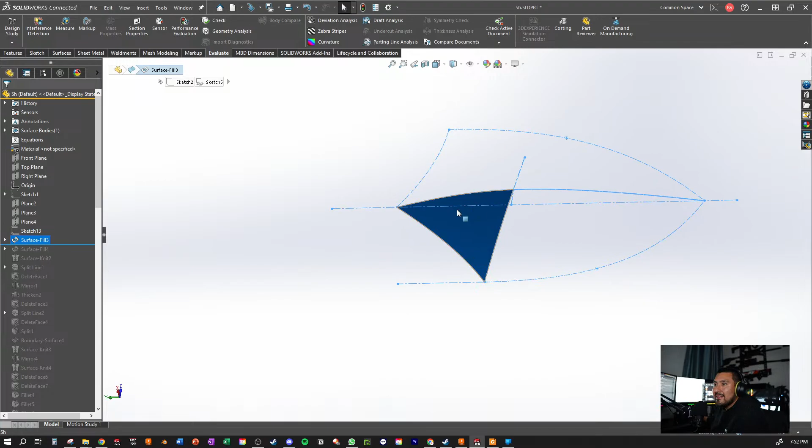So I did a surface here. You see the shield outline. I did a fill here, and then I did another fill. And to even get to this point, I was like, "What the hell am I doing here?" It's because the Zelda shield has a certain line distinction. I'll show you. Actually, you can see it here. This line, you see that line?

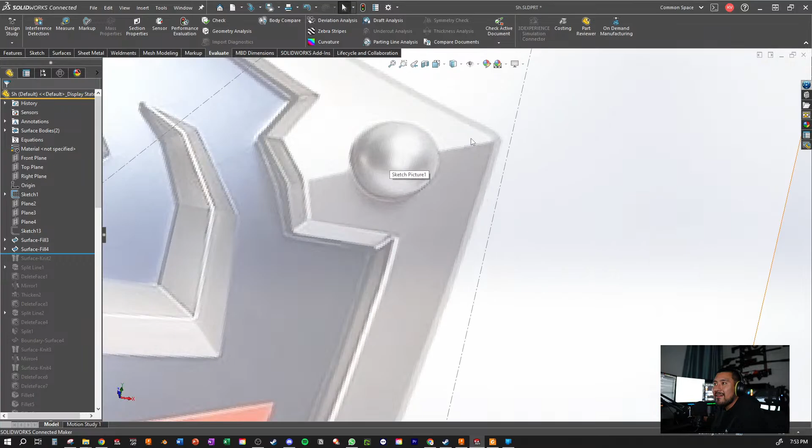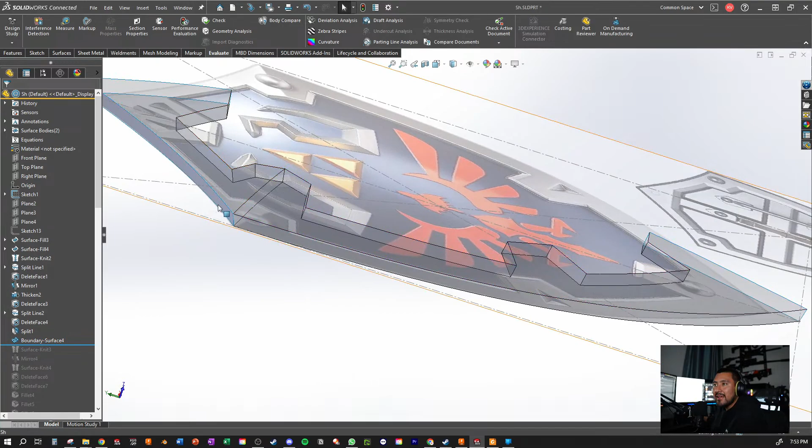Yeah. Like the Zelda, I wanted that line, but it's also very smooth. You see, it's a very smooth shield in the middle. So I couldn't use both of them. So I did that first, and I did a complete patchwork in the middle. I think it's this one right here. I started just cutting it up, but yeah, that was pretty difficult.

But I'm gonna give you another project that I find a little bit easier. I just probably don't have time to do it, and then you could take that on and show it, and I'll show you how to post it and get a little money out of it. Selling that as an STL, it's okay for a little bit of money. It's cool. Yeah, I'll take it.